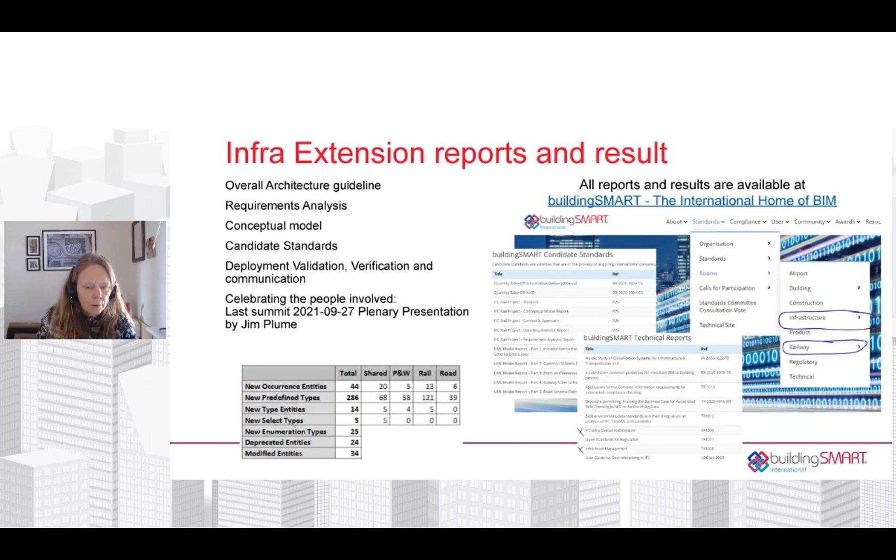Also, at the last summit, Jim Plume had a plenary presentation similar to what we're doing now, but that really acknowledged the project teams that had been involved in creating this standard. So I think that is also available under the events page on buildingSMART.org.

As I said, we've been working with this for many years now, and we haven't finished, but we have come to a stage where we actually have a published standard. It is going to ISO. It has been sent to ISO and is being worked with there, and we are expecting a candidate or an ISO standard at the end of the year.

We will hear more about this during the summit. There are a few projects also ongoing. There's the railway room that's going into a new phase, with a kickoff during the summit here. In a couple of days, we have the infrastructure rooms continuing working with their roadmap. And the tunnel project, Michel will talk to you about in a few minutes.

We have an expert panel that I'd like you to attend. If you've been attending our previous experts panels regarding the infra extensions from the infra room, we have a common expert panel tomorrow that will present the very last work that we've done with the MVDs and test instructions, etc. So we haven't seen the last, but it's at least a very important milestone, and you'll hear all about it during the summit. That's all I have to say. Thank you.

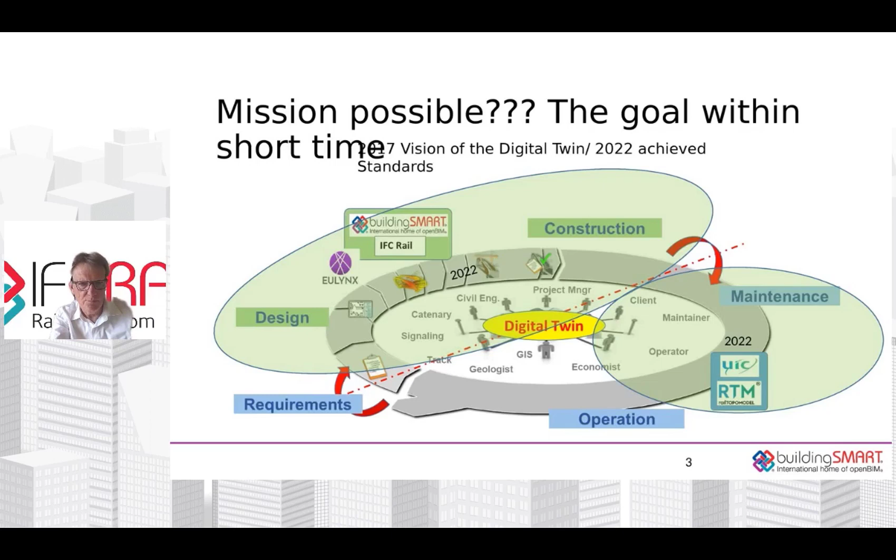So some basic information - thank you also to our stakeholders. It's a little bit smaller, as you have seen before in Karin's presentation, but it's mainly railway companies from China, Switzerland, from the Nordics, all the Nordics railway companies, as well as French, Italy, and Austria. I hope I didn't forget anything. No, I think this is more or less our stakeholders. These were really a very important part of it, that we also get so much support from the stakeholders that we could really work as it has been foreseen, to move on.

They supported us with many in-kind operations, as well as with this 4.6 million in cash. So what I mean with in-kind is these 100 domain technical experts and other technical experts working in the project as well. So 48 months, actually 2018 to 2022, not 21.

It's because we finish now exactly 4 years after our start at the Paris Summit, which was a challenging situation at the start, because of how to bring all these languages and cultural aspects together. So we defined to organize a PMO with all the language skills requested, except Italian, but the Italians speak very good English, so this was not a problem. We had this PMO running with 5 or 6 people with this language, and also technical skills requested for this project, which was a great success during this time, and a great pleasure to work with all these guys. Thank you.

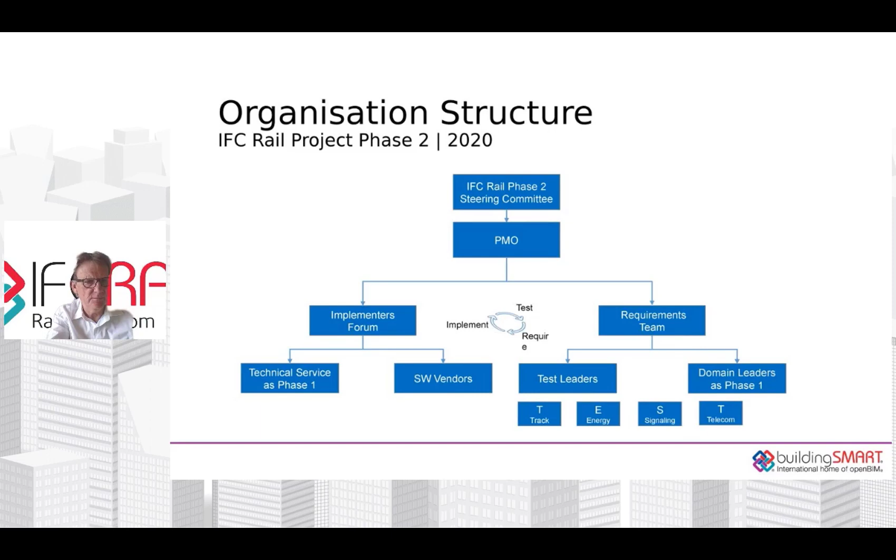As Karin said before, the software vendors who joined made this a very nice success. Thank you all for this. We did this together with the infra project, so we could ensure every functionality of the schema is understood by software vendors, making it much easier to implement into software suites during these days.

So that's how we collaborated during the last months, and it was quite demanding, but successful. We brought it together, and this is a huge thanks and a huge success for everybody in this project. I think at the end, together with infra, more than 150 people were working on it. Okay, we finished it. IFC Rail is part of this 4.3. Again, good stuff, and thanks to everybody.

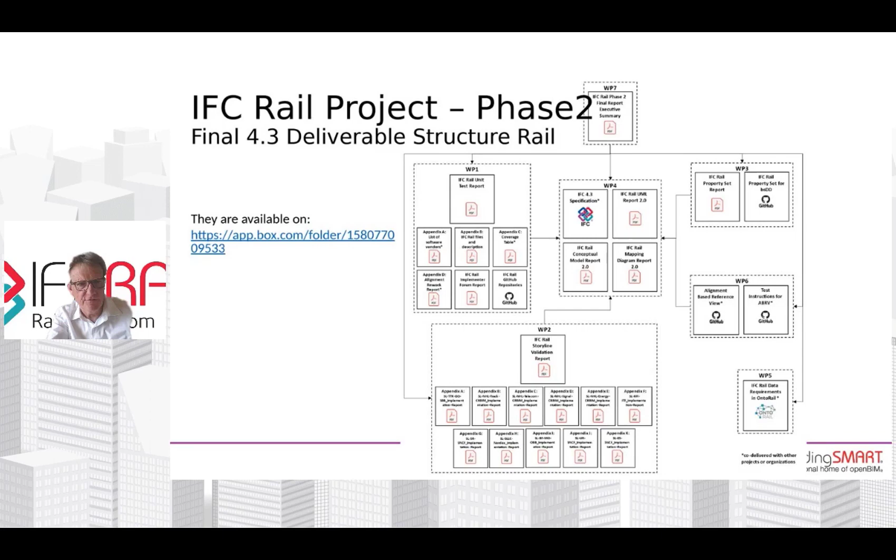So the deliverable structure of the rail project is shown here in these 7 work packages. I have to move on, I cannot go into detail of these work packages, but you can find them on Box along with the presentation showing what the deliverables are.

What you also find on Box is a final report, and this final report actually covers all the different work packages we worked on in the project, going from the project organization to the financials, the collaborations with other rooms and software vendors, and what stakeholders expected from us.

That's all about it. Again, big thank you to everybody for the confidence and trust we received during these 4 years. I've probably talked to you about this before, and I'm looking forward to seeing this implementation in many software suites. Thank you.

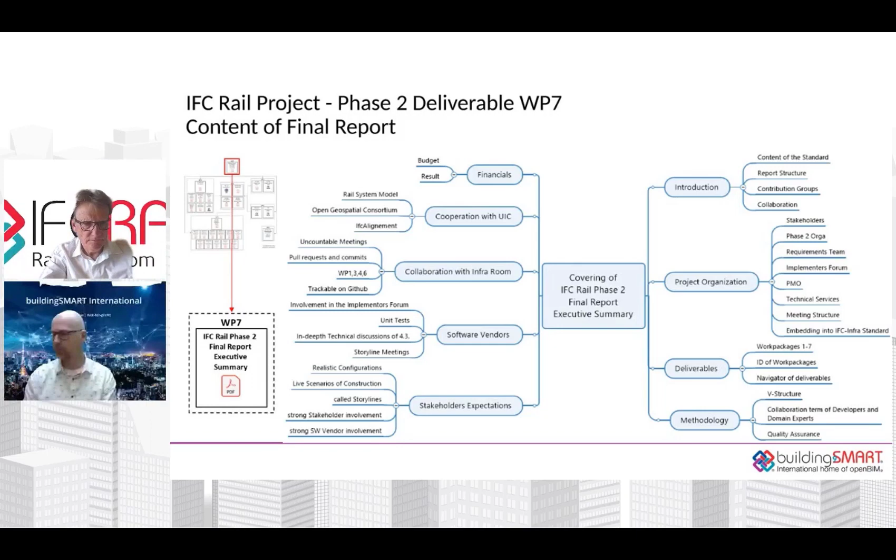Thanks, Christian. Dan, has Thomas Liebich arrived? I can't see... if not, I'll bring... oh, he is here, okay. In that case, Thomas, I'm going to ask Christian and Karin to come back in after you've spoken, and we'll have a brief conversation before the next presentations. But as Thomas is here, we'll let him continue for now.

So Thomas, are you talking about your support of the progression of these two projects, which have been combined into IFC 4.3 and are now on their way to becoming an ISO standard? Correct, that will be the topic of my talk for the next 5 to 7 minutes. I'll present in my dual role, first helping buildingSMART integrate IFC 4.3 and the projects to prepare it, but I'm also engaged directly at ISO as convener of joint working group 12, within subcommittee 13 for BIM, within TC 59 for construction. Can I move the slide myself? Oh yeah, okay.

I think Karin already showed this overview diagram, and I'd like to take it from her presentation to show you the remaining steps until the absolutely final release of IFC 4.3 as an ISO standard. It will be the third edition of ISO 16739. The first edition was IFC 2x3, the second was IFC 4, and now the third will be IFC 4.3.

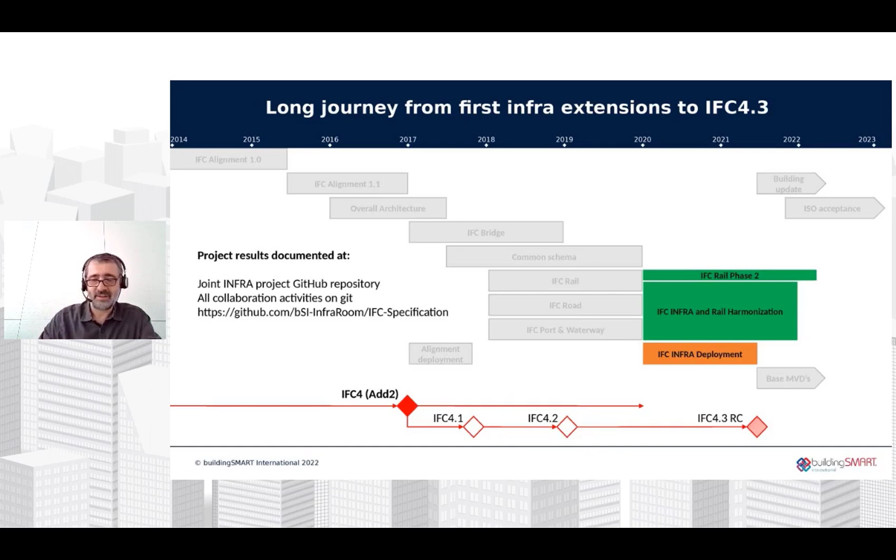As part of the preparation process for the ISO submission within buildingSMART International, this work had been integrated into the main development fork, as you can see in the red part of the diagram of IFC 4.3. In parallel, there were also updates on the existing building domain, represented solely by IFC 4. These two development streams combined led us to the intermediate stage last month in March, where we combined all this development work and submitted it to the ISO working group.

So today we started this process. In ISO there is the so-called New Work Item, the NWI, created by end of last year by decision of the national standardization bodies to officially start the ISO acceptance process of IFC 4.3. This ballot was 100% positive, so all participating national standardization bodies agreed to it, giving us an overwhelmingly positive result. Now the actual technical work, by a joint ISO and buildingSMART technical team, will start in 2 weeks on the 6th of April, based on the IFC 4.3 ISO submission from last month.

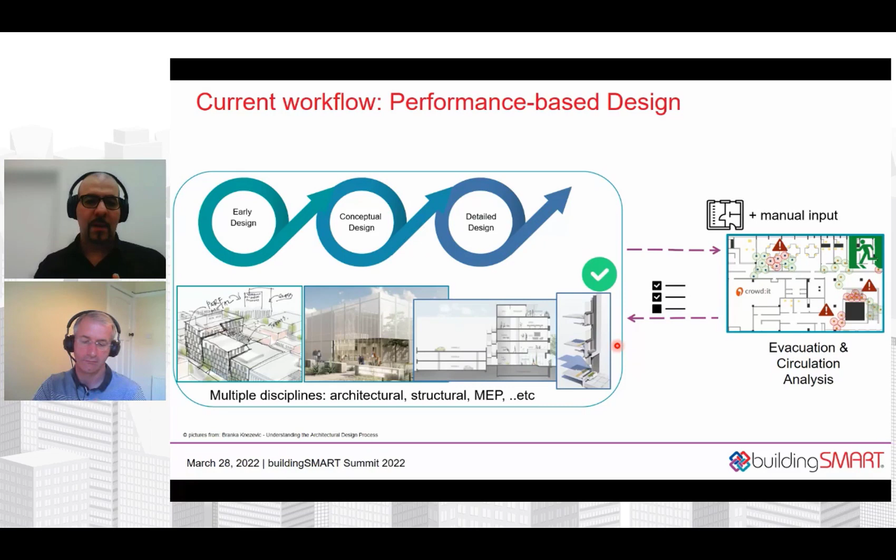And we want to make those analysis tools accessible through all phases, using smart building models that are complete and include all necessary information in a standardized way. You just saw the presentation before about IFC 4.3, and standardization takes time, but it's really necessary to have complete models and smooth exchange between the different kinds of software.

To achieve this, we need to define something called Model View Definition, or MVD for short. This acts as a contract that describes the needs of simulation tools, making it easy for different BIM authoring tools to export IFC models that fulfill those needs, and for analysis tools to follow this MVD to easily parse and understand exchanged models for a smooth, automatic workflow.

So this is exactly the aim of our project, that we want to have all of the tools connected and smoothly exchanging models to have a smooth way of doing simulations during the phases of the design.

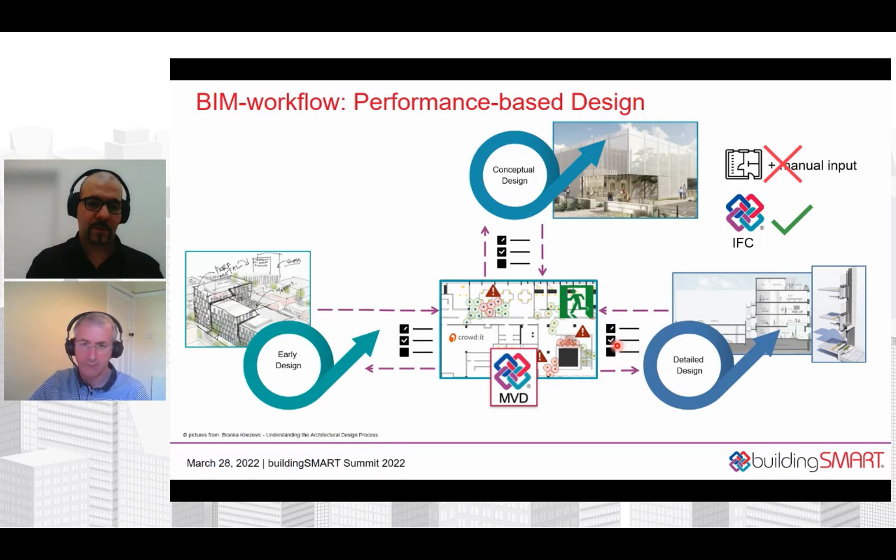So we submitted an activity proposal, and then we started with requirement analysis to develop comprehensive use cases. Afterwards, IFC extension, or investigation of missing information from the IFC schema, will be performed. By missing information, I mean it could be missing object types, but maybe not - it could just be simple property sets and properties that can be defined as common, that people can follow and adhere to.

Our project is divided into two phases. At the moment we are finalizing the use cases, which means we are at the end of phase 1. Then after we have all the use cases completed and published, the evaluation of the existing schema and how we can fulfill the needs of those use cases will start.

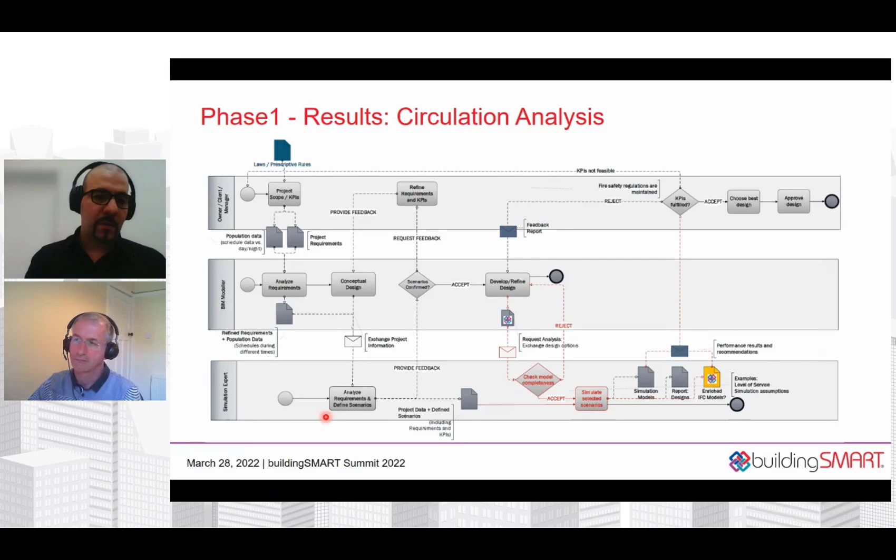Especially, we focused on modelers - architects and engineers - and their interaction with simulation experts, who take IFC files and perform different kinds of scenario analysis, then send back results for evaluation. So here you see this process for circulation, and afterwards we worked on evacuation.

The first one was for circulation, then we started working on evacuation for different countries. Here you see this process map - it's based on the RIBA guideline. RIBA is well established in the UK, if you wonder, and I don't expect you to read it clearly if it's not visible. We will share links later that you can access and read in detail.

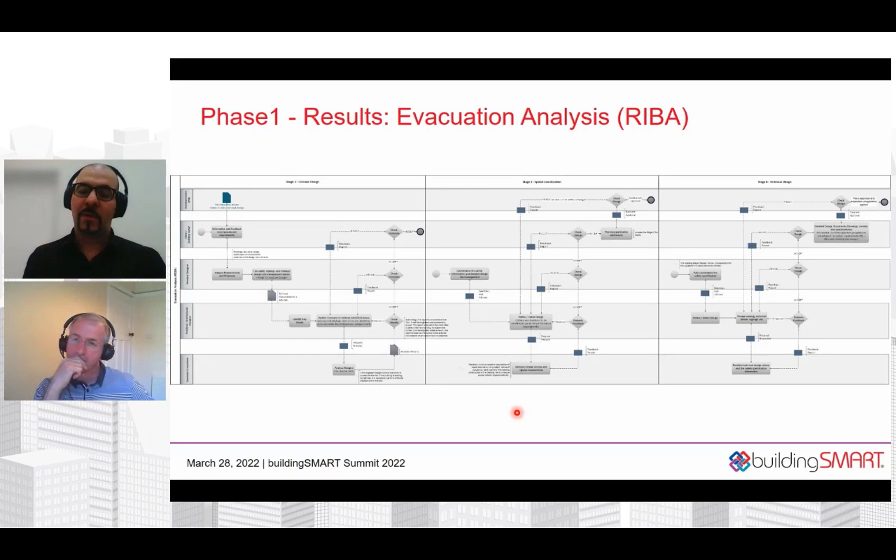Finally, we developed international process maps that cover flows in different countries, because we noticed that while RIBA is well established in the UK, in other countries like the United States and Germany the actors involved and the exchange of information is a bit different. Even the interactions and decision points are a little different. But we're happy that we managed to have one process map covering multiple countries at the same time, giving our project an international flavor.

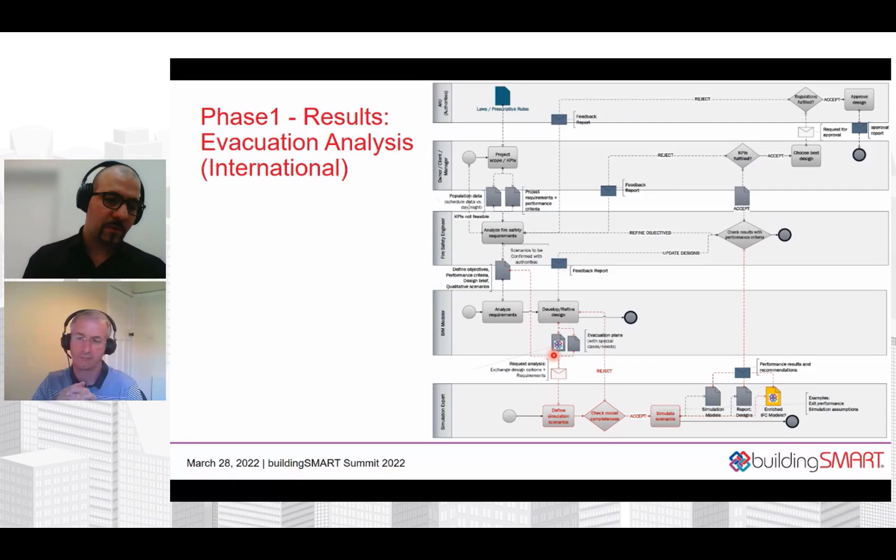From process maps, we saw exchange of information. For example, we are exchanging an IFC file between a modeler and a simulation expert. So what kind of information does this simulation expert expect in this IFC file? To answer this question, we started making an exchange requirements list.

Since we are still in the first phase, we try to develop it on a high level. You see here that we have categories, subcategories, and then the different kinds of analysis. In phase 2, each one of those will be defined in more detail, where object types and properties will be listed and then mapped and matched with the existing IFC properties and schema.

We will try to highlight any needs that are missing, and hopefully it's not a big need for a new object. It could be properties, and hopefully smooth properties that we can use.

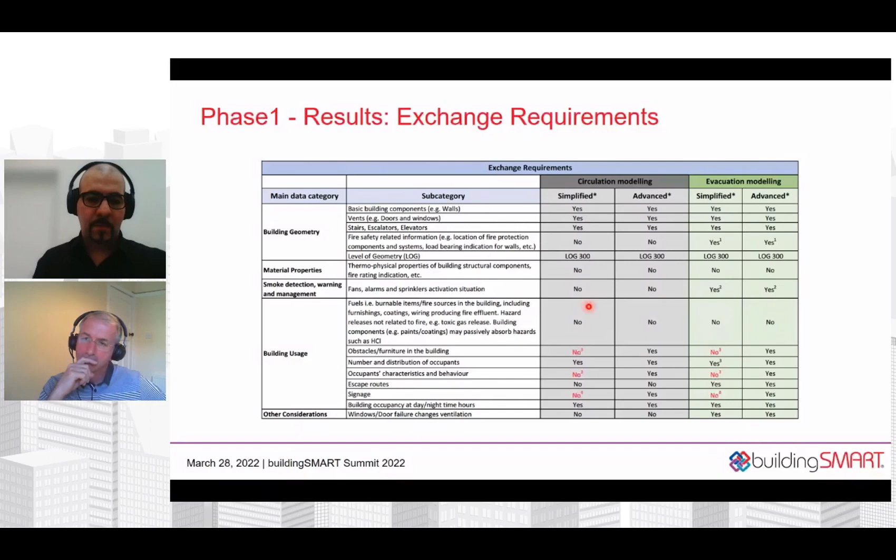So this is for exchange requirements, but once we do the simulation or analysis, there will be analysis results, and we want to bring those results into the design or to the designers. We thought it could make sense and add value if we can attach those results to the design or to the model back.

Everyone knows IFC can handle adding more information, but it could be that we don't need to extend IFC to include all of the properties or new information inside it. This is why we came up with multiple possibilities.

The first one is to include some basic summaries as properties and values. The other approach is linking properties with external files, using IFC external links. And the last one is by using the information container.

ISO standard - so here at TUM, for example, we did a lot of experiments and implementations with it, and we saw how powerful it could be for linking or mapping objects to different kinds of results.

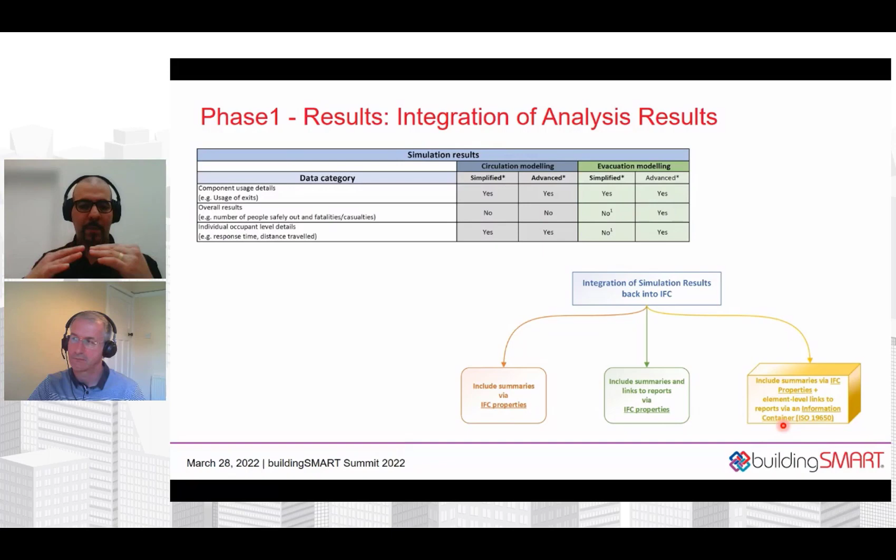I know it's a little bit challenging to absorb and give a quick summary of everything we have done so far. This is why I would really invite everyone to access our published use cases on the use case management tool provided by buildingSMART.

I think you need to log in - you need to have credentials to log in and see the full use cases. Without login, you can see only the basic information available. If you want to see all the details with everything I showed so far, you can create credentials, log in, and then have a look. We look forward to hearing your feedback or opinions if you have any improvements you can see.

Now I will hand over to Pete for the next steps. Thanks, Jimmy. Pete, can you hear me? Yeah. Yes, can you hear me okay? Yeah, perfect, yep.

So if you can just click through the sequence as we talk, that'd be great. Just a quick update - I'm Pete Thompson from Autodesk. I've been helping a little to coordinate some of the developments that Jim has described.

We have been considering 3 related MVD development areas. The first is regulatory, and we know that there are regulatory activities planned in the Regulatory Room, and that will be presented in session RR2 at the summit, which would be great if you could attend.

For the fire, smoke and structure analysis, last year we applied for EU funding as part of a large automated regulations process bid, but that was unfortunately unsuccessful in a very competitive call. On the occupant movement side, Jimmy's described the great progress underway for the occupant movement MVD, undergoing phase 2 work soon. I'd like to thank Jimmy for all his hard work there.

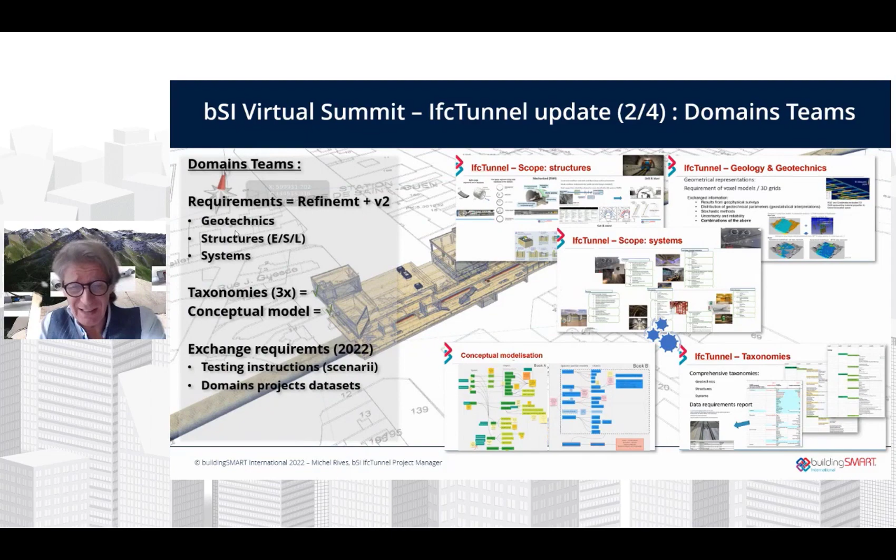Next to these 3 domain teams, we have a tech team looking at the required extensions we wish for in terms of advanced geometries. That includes things like properly modeling nonlinear transitions between cross sections, which, by the way, is a requirement not just for tunnel design but for bridge design as well.

The second advanced geometry relates to using 3D grids, so-called voxels, which allow representation of non-continuous situations. For example, for underground cases, you would represent the probability of soil and subsoil characteristics through the use of those 3D grids, with different properties associated with every single cell in the grid.

And last but not least, a way to link data stored in other formats, external data—typically applying to observations but not only—that would allow us to link to data files stored in DIGGS or AGS formats, for example, DIGGS being very much used in the US, AGS in the UK, and therefore linking the conceptual model with the external file formats.

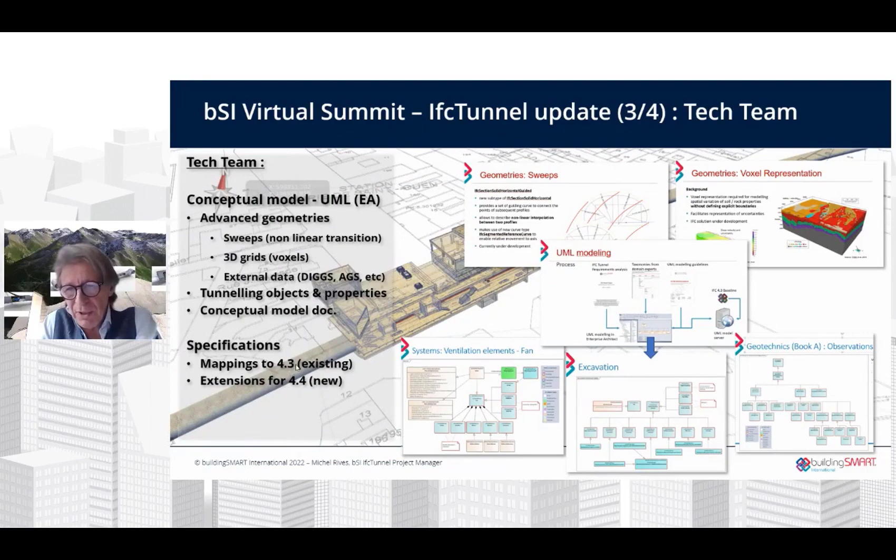Our activity plan as of today for 2022 will lead us to leverage all the modelization work done through UML in the Enterprise Architect tool, and the set of automated processes that can be generated from this new production platform—like automated consistency checks run directly from the platform, generation of the Xpress schema, generation of everything needed to prepare for translation, and the preparation of input required for the BSDD solution, mainly related to classification.

We have work to do in terms of assessing and potentially extending a bit the alignment-based reference view MVD, which we depend upon, but that is fully logical. And we need to provide the specifications of the so-called concept templates, object templates, so that the exchange can be structured properly.

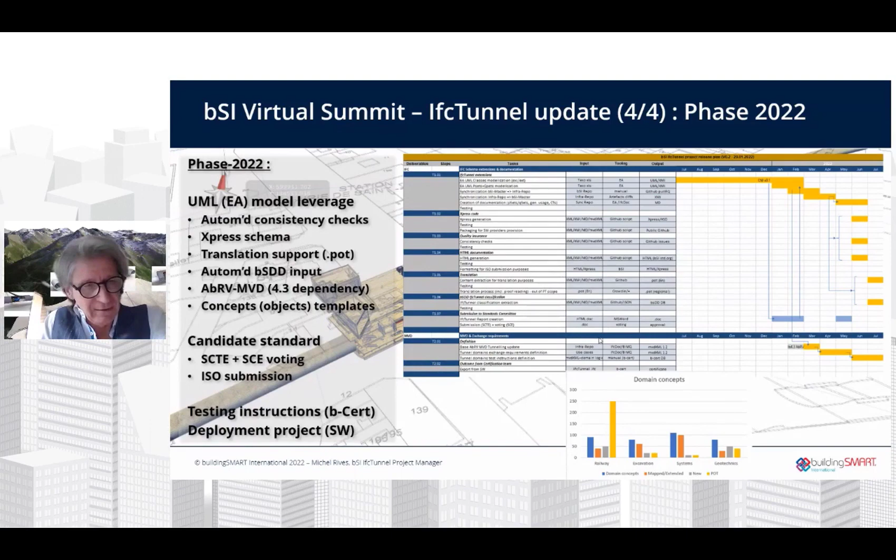So that's a quick update I wanted to give you, and if you are interested, we'll give a very detailed set of presentations on Thursday, March 31st this week, in our expert panel number 1, 2:30 CET time, and on Friday, 10 CET time again, where you'll get a much more detailed perspective of this conceptual model we provide, and all the objects that are part of it. So that is what I wanted to give you as an update.

Richard, over to you. Michel, thank you very much. It is a fantastic project and being very well run, I have to say.

Just to say that although the tunnel project will generate a newer iteration of the IFC, that won't affect any software that anybody produces regarding IFC 4.3. And it also makes us aware of the need for more geotechnics work within the community that serves both the infrastructure and the building domains. Michel, unfortunately, we don't have time for any questions, but thank you very much.

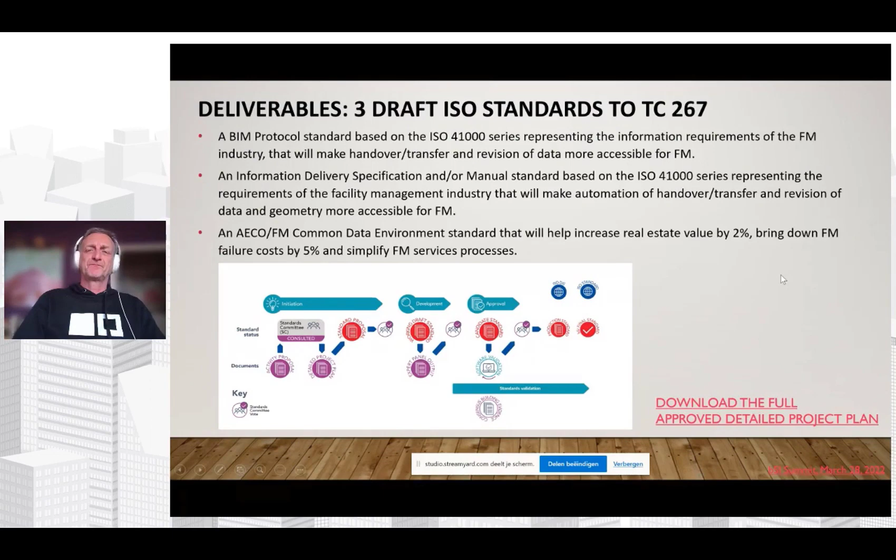We decided to use the work groups and the industry insight papers that are going to be delivered as official part of the standards governance process, meaning that the industry insight papers have been brought to the building room steering committee for approval, for feedback, in order to make them an official publication of buildingSMART in this project in April 2022, in the coming months.

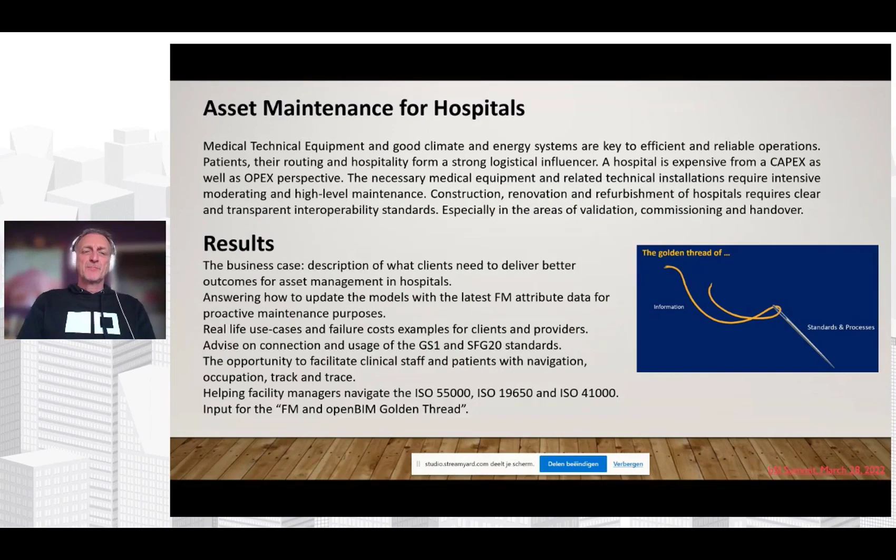And what you see in a lot of these 5 white papers is the focus on the navigation, the integration, the connection of the ISO 55000 for asset management, the ISO 19650, and the ISO 41000, in order to bring those worlds together as an input for the FM and openBIM golden thread.